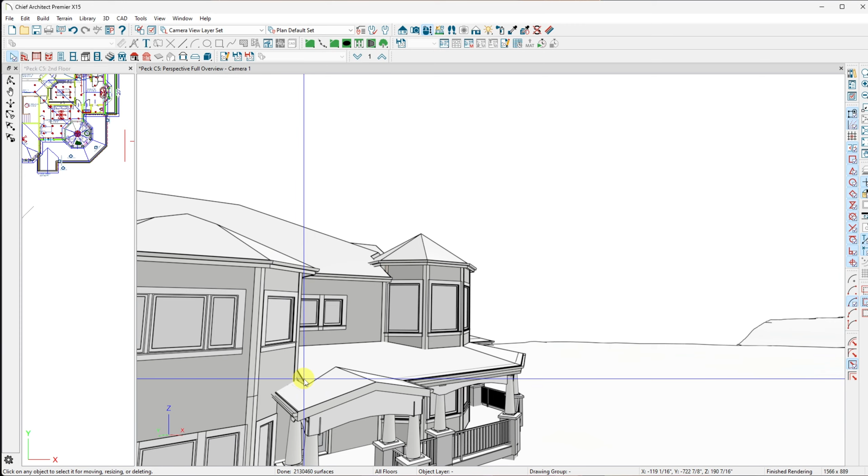But with this entry roof, I don't think it'll be too visible, and it should look pretty nice. Here I've got a couple holes in the wall, I'll get those fixed up too. But first I want to see if the lowering of this roof works out.

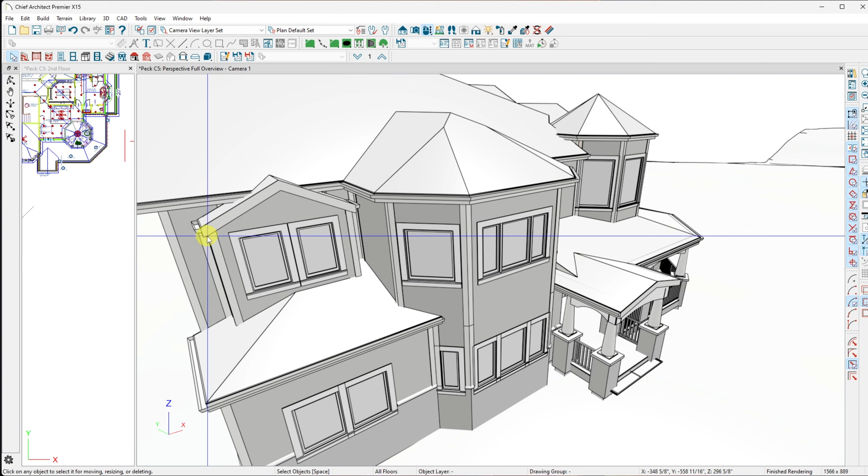It's just that window area. So this plate's set down at 7 foot, and then it's a vault. I'll have to get that drawn probably in AutoCAD, get some true heights and stuff, and make sure I'm good with insulation values in there. But I'm just kind of looking to see if we're even, if we're close.

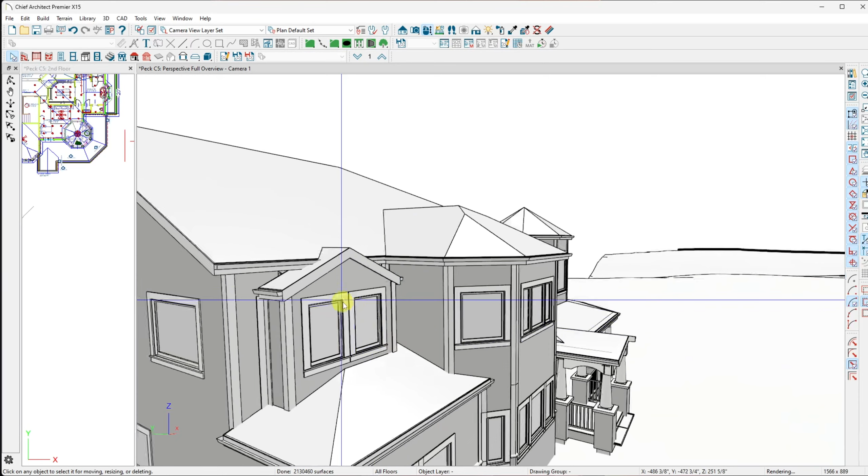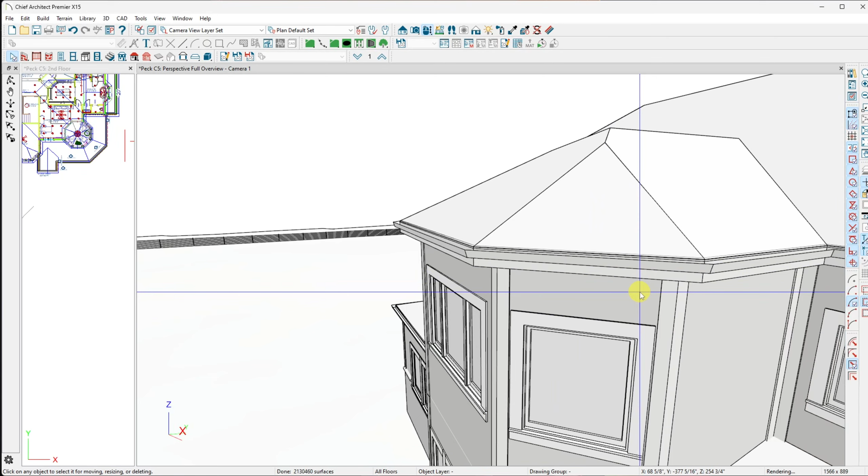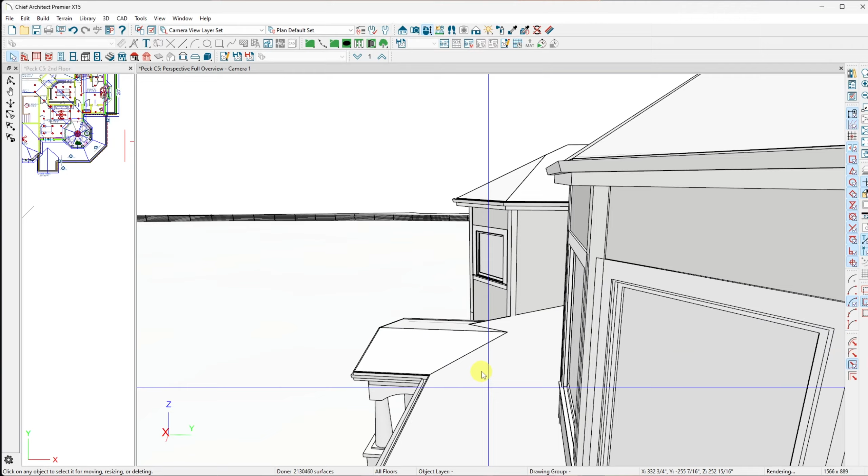As I come around, we've got the turret. Most of this is 6-12, this is 8, and this down here is 4 and some 3. There's a little bit of 3 in there.

So I'm getting too close to windows. Here's a little better view of that gap that I can close off if I don't use this as a hip. And when I make this change, it's going to screw up some other parts of the roof.

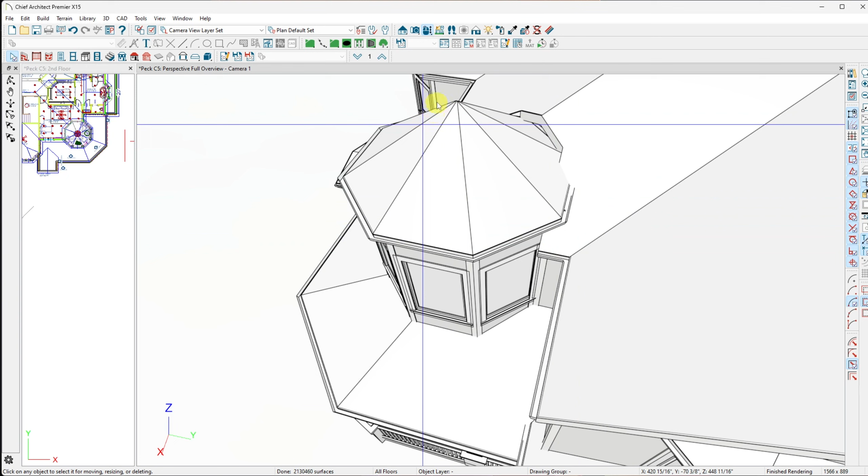So I kind of need to know before I make those repairs, and it probably will screw this one up - not sure on this one, but it may. Actually, I'd probably make these edited. I'm going to pause for a second, make those edited, that way they won't change. Okay, they were already marked as edited, so they won't change on me.

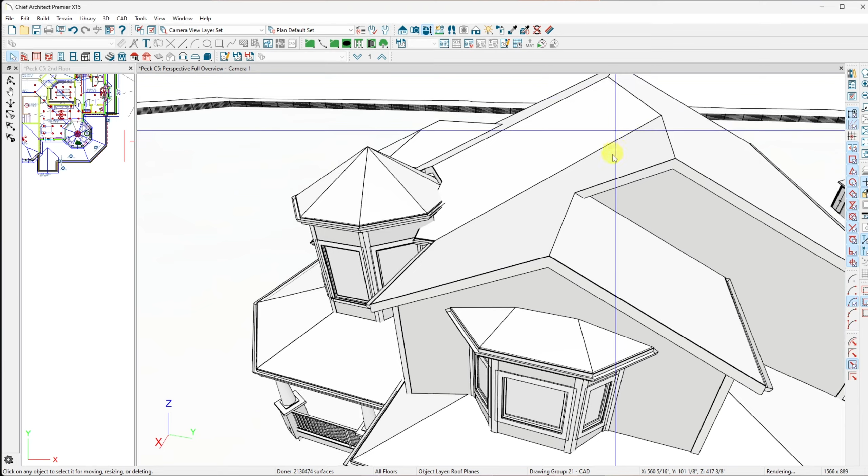So, just kind of taking a gander around. Any of these roofs that you want to change, it's time to speak up. So this is at the chimney, and just a tiny little hip.

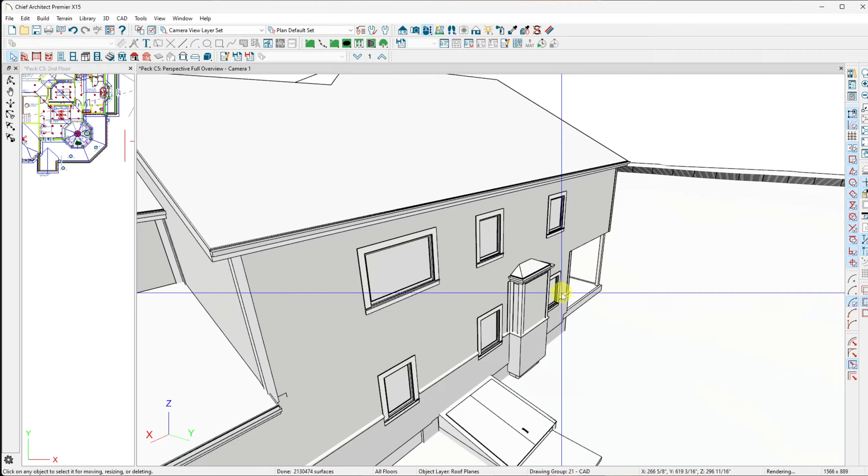What I was talking about with the lead stuff was like this guy - make a little lead roof there, and then a lead roof here on this bay, certainly lead up here, and that was to solve the issues you thought you might be having getting materials. Whether or not you also make this one lead, I think is optional, and I can certainly show some different materials so we can see what it looks like. And then this portion.

And I think this would be something to discuss versus what I assume would either probably be like a smoke color, a dark gray roof up here, or a green. Most green roofs that I've seen are kind of like a forest green. I don't think it'll go very well with the olive.

So I think we'd probably be looking at trying not to be green, because my kind of idea with colors is you either make them exact or you make them very different from each other. Because if they're close but not exact, then it looks like a mistake.

So, what I want to do real quick is show you—I'm going to pop into the floor plan here, and this is going to be really hard to see for you, don't worry about visualizing this. I'm just going to take this wall and switch it to a gable wall.

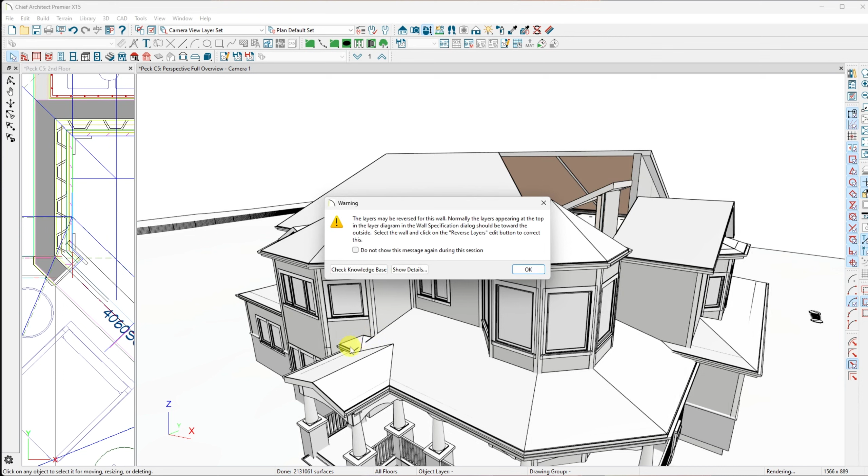Maybe in there—ooh, this didn't do what I wanted. I went almost to a shed roof. So let's see what I've got in there for a roof setting.

Oh—gable. Okay, now it's switched to gable. Let's try that again. Build roof.

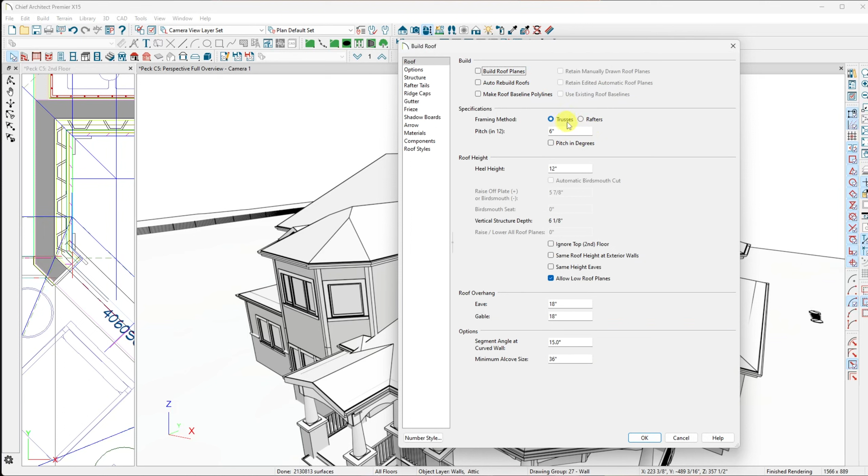See if I get what I want this time. Come on. I don't know why I did what I did, to be honest with you.

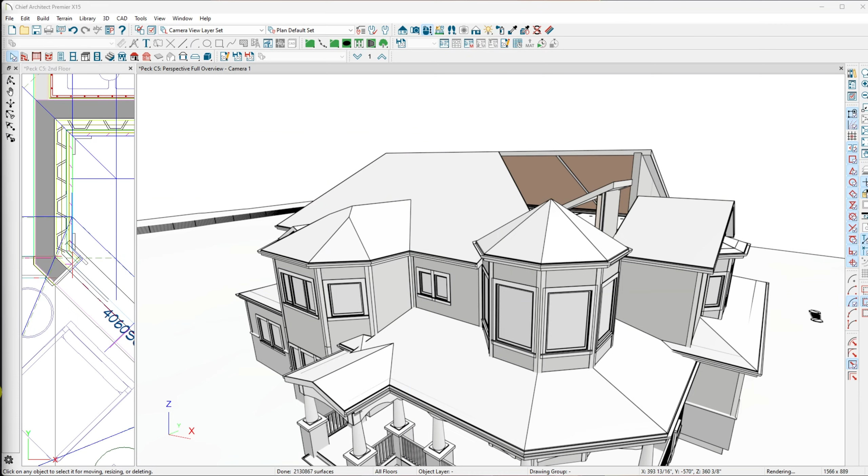So I'm going to pause it and fix it manually. I got this thing altered in this grayed area—you can see how it joins the turret roof—and then I'm going to bring it down to a smaller gap.

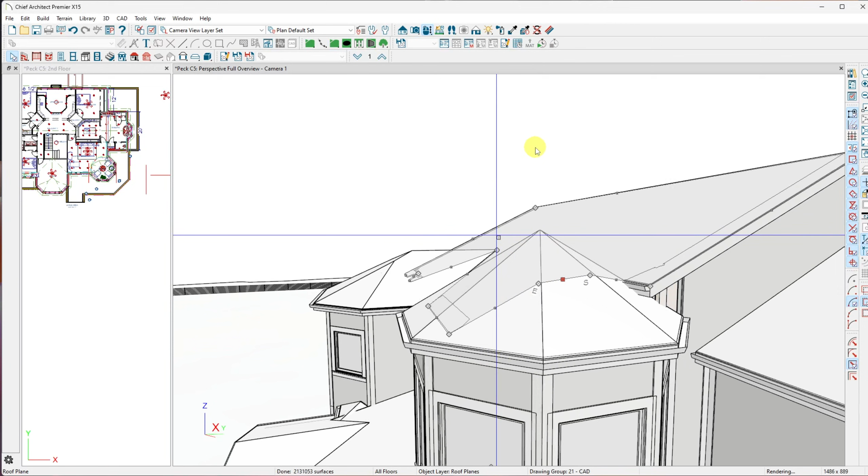I'll get this stuff repaired by building it correctly. But this is the option of just gabling this all the way through. Again, every time we simplify something like this, we are talking about saving some money.

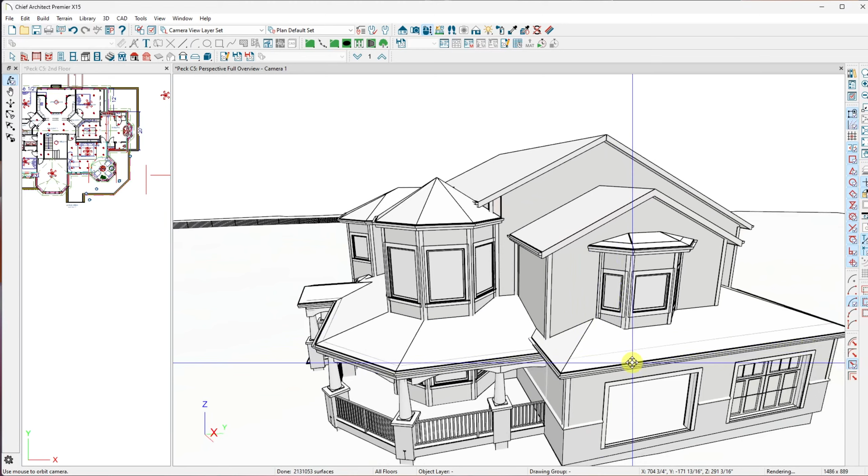So I can figure this out and get that to clean up with these minor errors, as long as you like this gable look as much or better than the hip I just had on there a moment ago. You can get back to me on roof preference, maybe even speak to Shay or whomever.

And like I said, this roof here is just a product of using that build roof tool. It's trying to build a roof over this, and I just delete it, because we're covered from the other roof, so I don't need them.

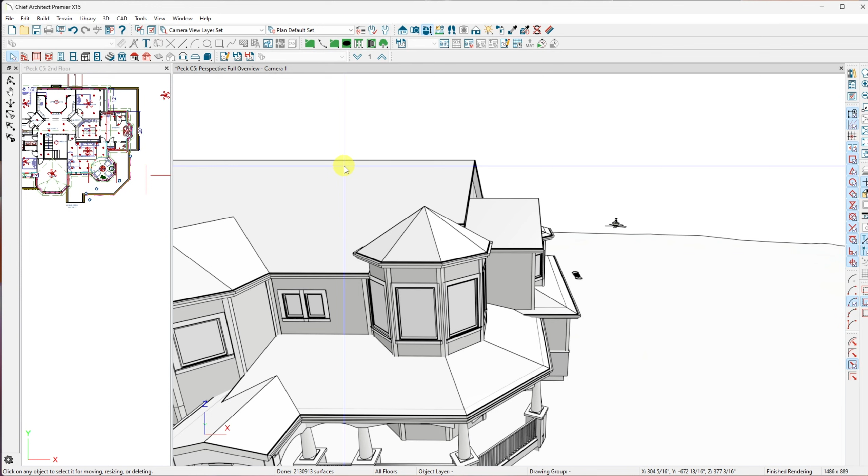And before I just toss this fan away, I want to make sure I don't need it somewhere. I think it probably came from the master suite, so I'll just put it back where it belongs.

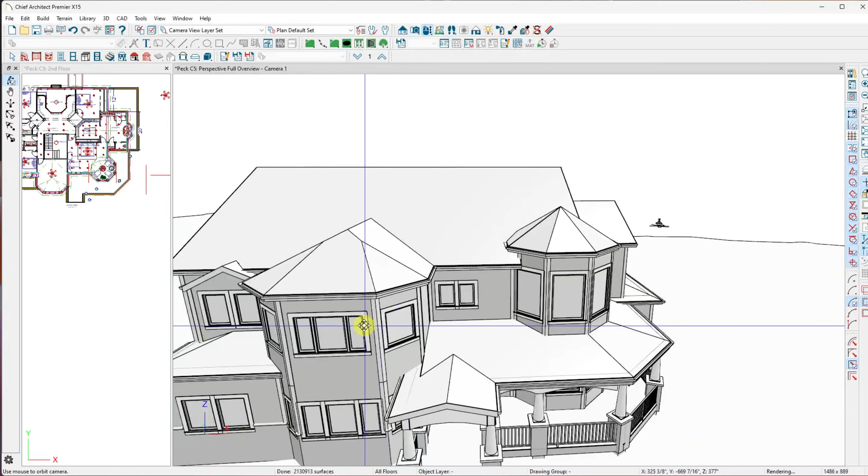But at any rate, just want your thoughts on this part as far as gable versus hipping that little tiny piece, and then the rest of these roofs, their overhangs, pitches, and how it looks in general before I do the final repairs to get a nice complete looking model.

Sorry it's a little jumpy, but I am working with it with the terrain. You know what? Let me try that. Now this won't look quite as natural,

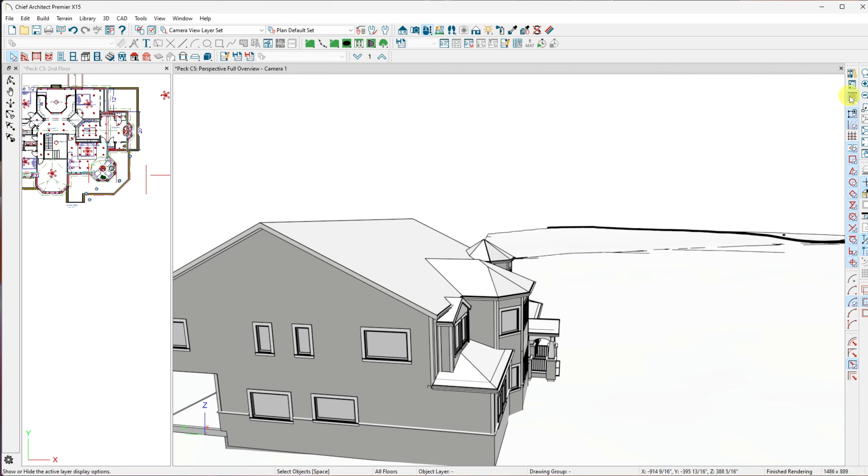but I can go down terrain, and I think if I just turn off perimeter—now let's see how she rotates. That's better, so I can get around a little better.

This is a big piece—actually it's not that much better. I probably have to delete the terrain and do a save-as, house only, to make this thing run a little smoother, or I just close it and reopen it.

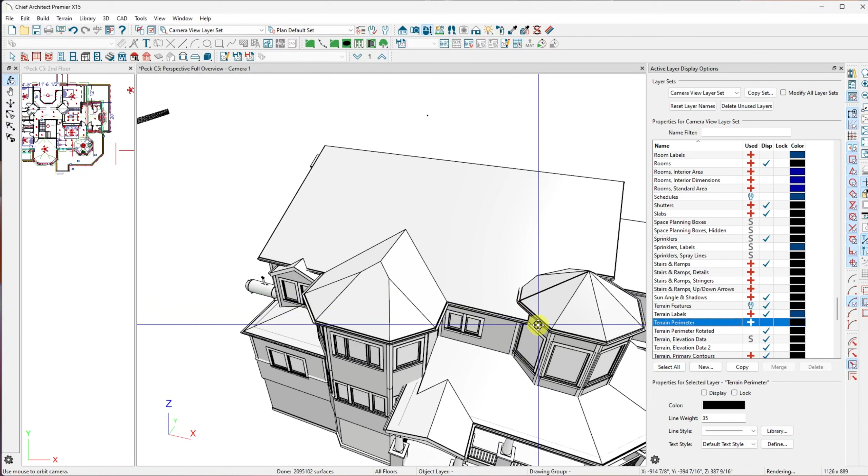But I'm going to do a save-as because I kind of want to save this. So it's just going to be C5 Gable will be my save-as. And then I will go back into the original and repair it correctly once I have word back on what you'd like.